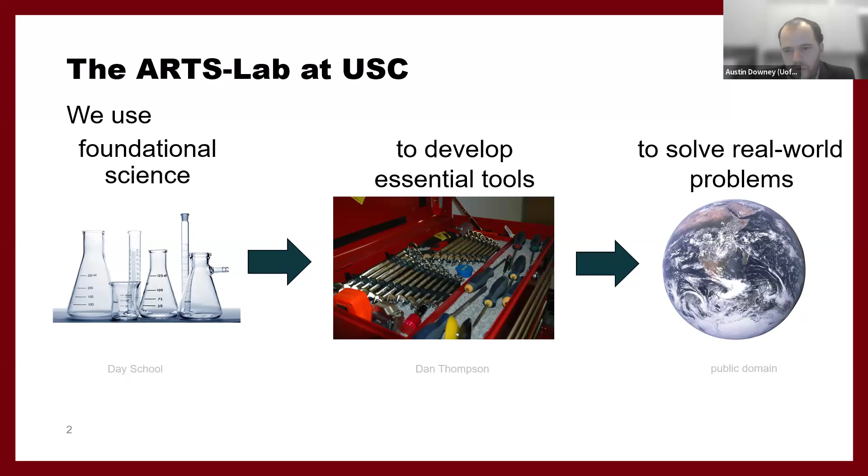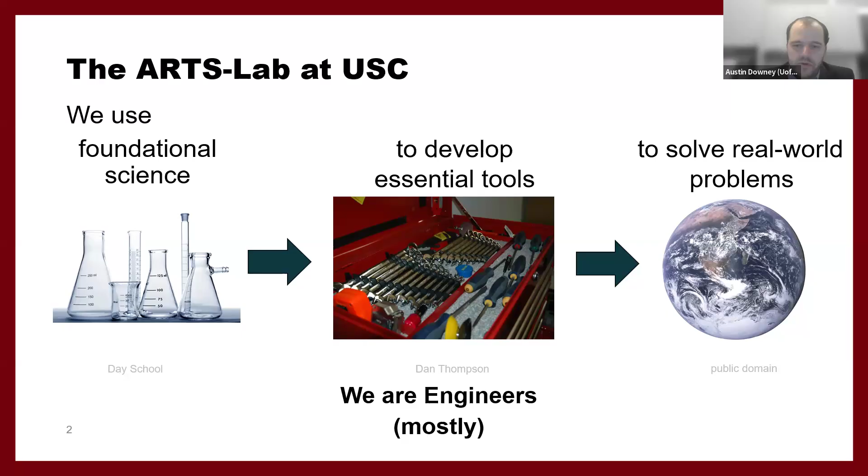We are engineers, is what I like to say, mostly. The group is made up of a lot of engineers, some computer scientists, a good chunk of computer engineers, a few physics, math, and some other interesting majors. So this is the group in general, or was the group about a year ago.

We work a lot on sensing for structural health monitoring, additive manufacturing, environmental health quality. We do a lot of data assimilation, so we use structural data trying to mix data and models, batteries and additive manufacturing, and a lot of AI/ML. We're very interested in explainability, automated decision making, and time series forecasting.

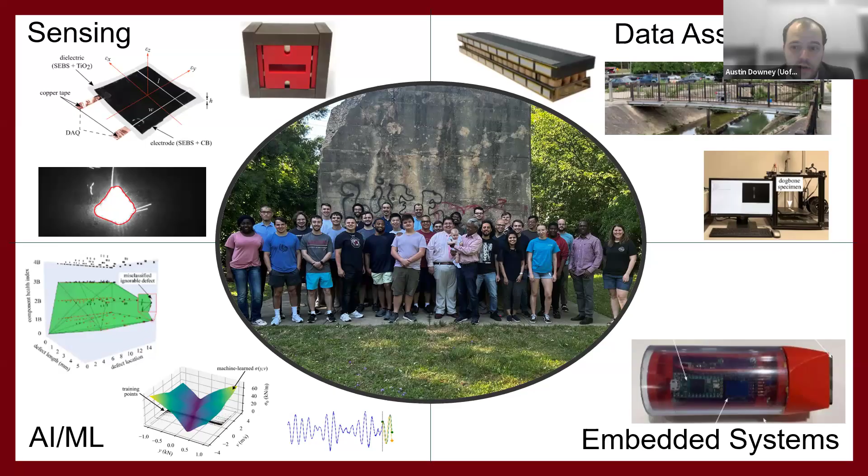And then the last one that might be of interest to the group here is we're very interested in embedded systems - a lot of microcontroller-based embedded systems, real-time operating systems, and FPGAs.

All of this is done with great collaborators all over the college, including quite a few in the Department of Computer Science and Engineering.

I apologize right off the bat if this seems a little simple, but I want to expose everyone to what civil infrastructure is. To me, I walk around any city I'm in and try to take pictures and look at the infrastructure, but I understand that may not be everyone.

So civil infrastructure includes the essential public systems - roads and highways. Roads and highways are very interesting because you have structures like bridges, and then you have materials like the road you drive on.

Bridges and tunnels, water and sewage systems - that's something you should be thinking a lot about. These are very old systems that are in great need of retrofitting, and are very expensive and very hard to retrofit.

Dams, levees, and flood control structures - very relevant to what just happened in South Carolina. Levees are a very challenging topic - you try to build huge dams to hold back the water using locally available material. It can be quite challenging.

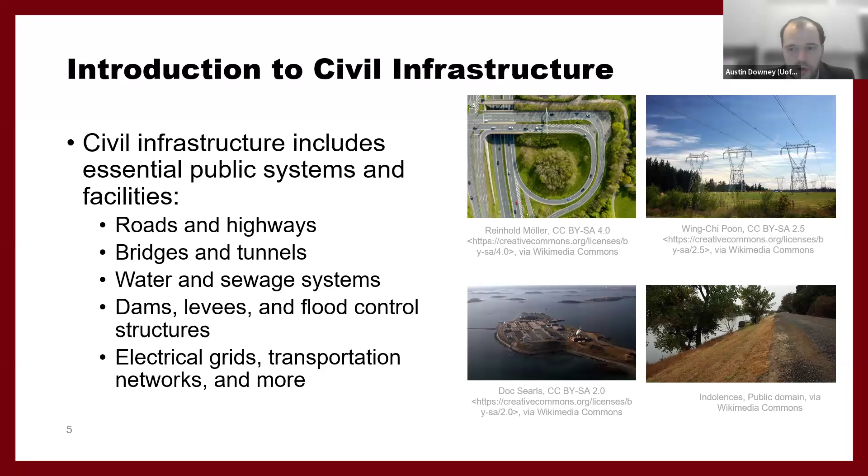And then something we won't talk too much about - electrical grids, transportation networks, and more. The electrical side of infrastructure is a whole different animal that we won't really discuss.

So infrastructure and maintenance upgrades are very important. On the top right is a picture from Germany, but this can happen anywhere - whenever you're having to upgrade infrastructure, it's incredibly expensive and incredibly detrimental to people's lives. So this isn't like upgrading a software package for an online shopping thing where maybe things show up a day late.

If someone's in a wheelchair, they can't get across this trench. If they're not able-bodied and willing to jump, they can't get across this trench. And so it can add a lot of hassle to people's life. And that's one of the reasons that we don't maintain infrastructure as much as we should, is because it adds hassle, which then comes back later and bites us.

The I-35 bridge collapse is on the bottom right. This was in Minneapolis. This was a bridge, lots of issues, lots of human factors here, but a plate cracked and wasn't appropriately corrected, and the bridge catastrophically collapsed, killing multiple people. And so, but these are very expensive, right? The bridge collapse that happened in Tennessee, very expensive. The bridge collapse, slightly different, that happened in Baltimore, very expensive, and eat up a lot of the budget and maintenance, right? So these are critical for public safety and economic stability, right?

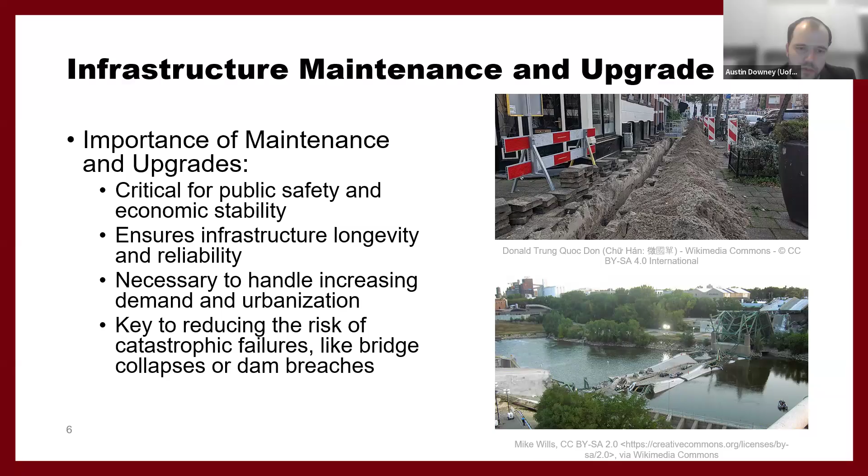Necessary to handle our increasing demand and urbanization. The world is urbanizing. The United States continues to urbanize. The state of South Carolina continues to urbanize. In the last census, the state of South Carolina gained population, but over 60 or 70% of the counties in the state actually lost population because people within the state are moving to the big cities and people from outside of the state are moving to the big cities.

This is not something that happens in the South as much, but where I'm from, up in the Midwest, you have a lot of rust.

So top right is water quality. This is kind of what happened in Flint, right? So our infrastructure affects the water we drink, the water we bathe in. One option is you just buy all bottled water, and that's a completely different conversation we can have about the effects on the environment of buying all bottled water.

The bottom right is the Arlington Memorial Bridge, right? And so this is outside of Washington, D.C., and we put salt on bridges to keep ice off of bridges, and this is what happens.

And so how do we maintain this infrastructure that's often built in an unsustainable fashion? As we continue to build suburbs, typically they are built by private companies that put a road in, and then they put a bunch of houses around the road, and then they gift the road to the city. Often the tax income that comes from the houses around the road is not enough to pay for the road. So who pays for that road replacement, resurfacing, in 20 years?

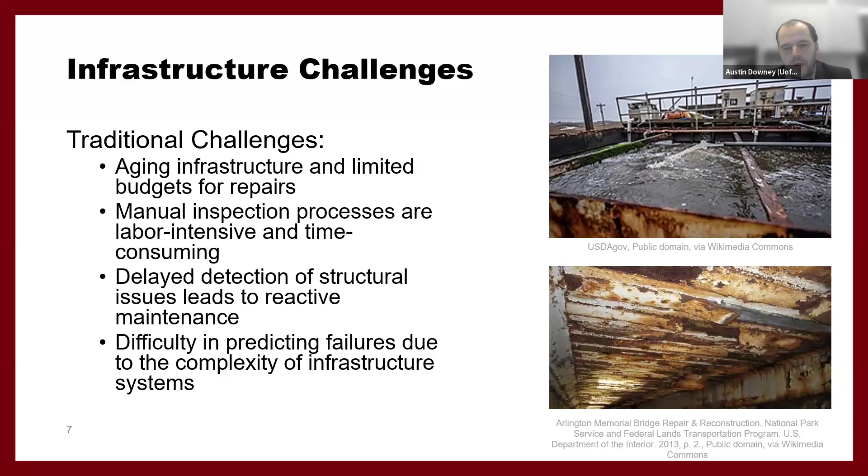There's a huge movement called Strong Towns, and I would encourage you to look at it. Just because the government may show up with a check once to pay for infrastructure doesn't mean that the localities actually have enough tax base to maintain the infrastructure going forward.

And so these are kind of the roles of automated decision-making, data analysis, machine learning, and I'm using the term AI here to encompass all of that, a very traditional aspect of AI, not just the newer, larger language models.

I also want to talk about the intersection of civil engineering and AI, right, or these automated systems. Everyone here is very smart, right? Otherwise you wouldn't be in a graduate program. And you have a lot of computer skills and technical skills, data processing skills. How do you actuate the world around you? How do you take those inputs and make them create changes in the world around you? It's not easy, right? Infrastructure is not something where you can actuate at a low cost.

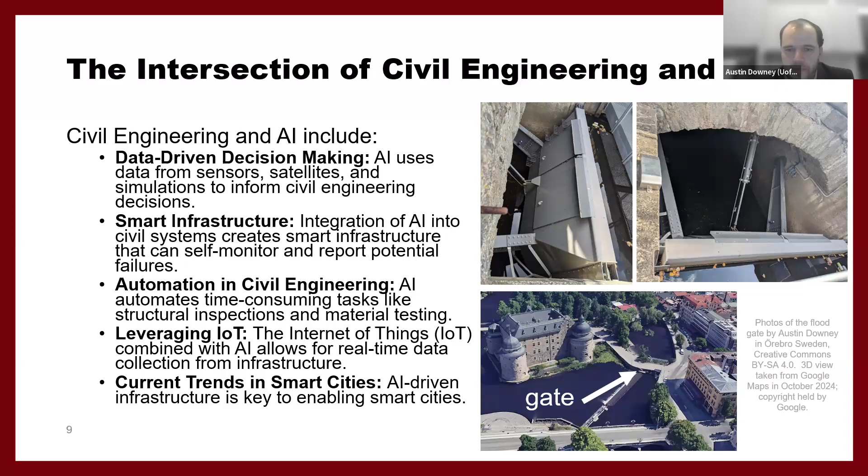So that's kind of a background on civil infrastructure, very broad, I understand. We'll talk through some applications and case studies, and feel free to speak up — I can't see, but if you have a question, just ask it. I'd love to have a conversation about some of the technologies we're developing.

One of the things we've been working on for a long time is structural health monitoring. We want to enable real-time modeling, monitoring, and early detection for predictive maintenance. This enables us to improve safety and reduce costs. We cannot afford to replace even a fraction of the bridges in the country, so we have to be very careful about which bridges we do replace.

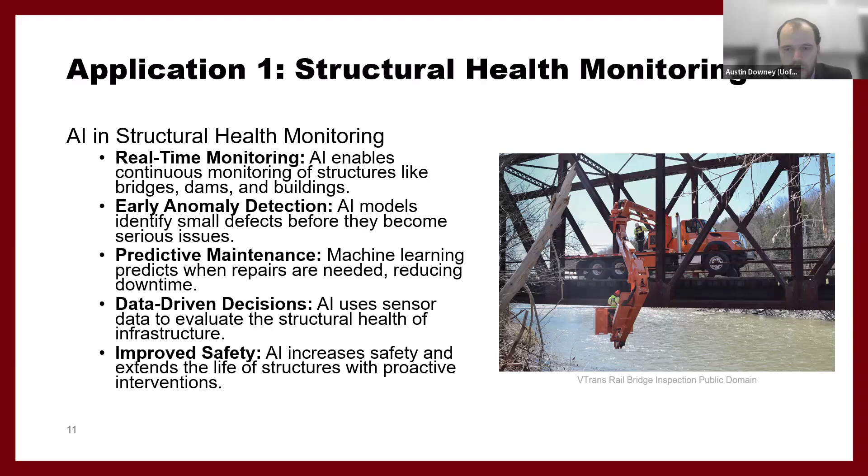AI forms a huge part of this — if you type in structural health monitoring, over half the papers will be related to AI and ML and how you process the data. It's a very interesting dataset because there's not a lot of data. The data you get from a bridge is very expensive, typically time series acceleration, and it's very hard to get seasonal variations in the data. So it's really a small data challenge, which is a growing field of AI — one-shot learning.

We've been working on this for a long time using large-area capacitive sensors that we've deployed on a bridge for over 10 years. On the bottom right-hand side, you'll see a bridge in Kansas with a fatigue crack, and these sensors monitor the fatigue crack, stretching over it. We've developed AI algorithms to process the noisy data and provide a crack growth indicator, CGI, where we can monitor the crack growth using a statistical analysis approach.

That's because you have a lot of changes in humidity, changes in temperature, expansion of the joints in the summer, contraction in the winter. So it's not just looking at the data spikes — there's a lot of data we need to pull out, and that's where a lot of the machine learning applications are coming from.

I also want to take a chance to express here that we do need a lot of help developing better AI systems for infrastructure. Civil infrastructure and civil engineering is very different from a lot of the traditional engineering fields you might study in college, because 99% of civil engineers — people who graduate with a civil engineering degree — have a PE, or are a professional engineer. You have to have a PE sign off on things that certifies they're safe for public use.

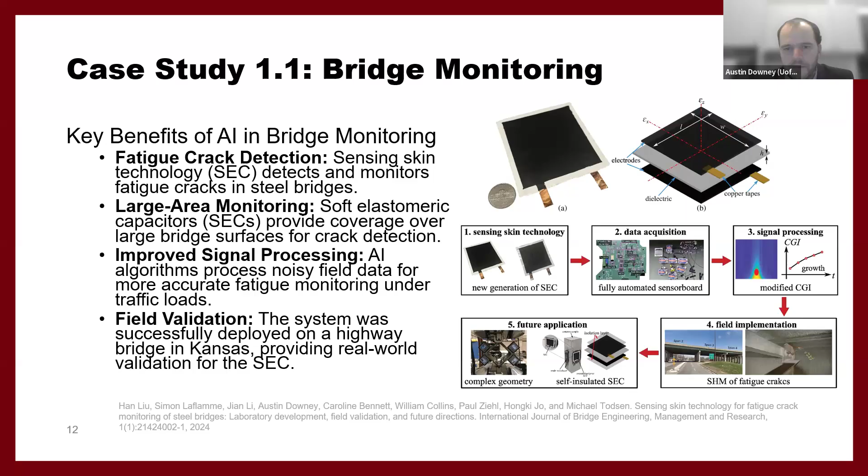Now, the accelerometers are not perfectly accurate, so we use kind of embedded AI, these LSTM compensators, to filter out the noise and pass a state at the lower levels of the frequency domain to help clean up the signal, right?

So we're very interested in autonomous sensor deployment, edge AI computing, and these efficient resource use, right? How can we do the computation at the edge so we only send back the information that we need?

Lots of other applications for things like this. We're definitely leveraging a lot of the work that's been done in edge AI for biomedical applications, where patient data is important. For us, there's not a huge security risk of sending back data from a bridge, but we don't want to pay to transport more data over the airways than we have to.

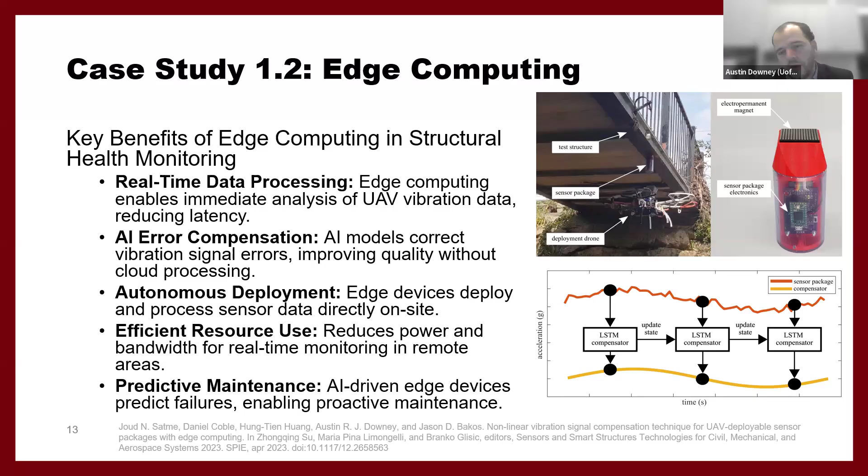And this is a lot of these are in rural locations, on the bottom side of bridges. You don't actually have very good cell network coverage, right? You might have decent cell coverage if you move a foot to the right, but when you're magnetically attached to a steel beam, you can attenuate a lot of cell signal.

Another challenge that's really interesting in terms of an AI methodology is water quality monitoring, right? So there's been a lot of work on real-time monitoring. You can buy sensors for things like pH, turbidity, contaminants, but lots of emerging contaminants, PFAS, hard metals, heavy metals, these forever chemicals.

There's a very big interest in early detection of contaminants, right? So you think about all the flooding that just happened. When that hurricane goes through North Carolina, there's a lot of pig farms in North Carolina. What happens to the runoff, right? Is that water safe to be in? What happens to the ecosystem of that water? Does that get down to the estuaries and affect clam life? So lots of kind of things that we're looking at.

Of course, some of the AI ML applications here are kind of predictive analysis, automated alerts, things of that nature. So one of the things we've been developing is a nuclear magnetic resonance-based water quality monitoring with online learning.

And this is a really interesting project. Been working on it very hard over the summer. And I don't know if you know what NMR is, but maybe you know what MRI is in a hospital. So MRI is magnetic resonance imaging, and that makes a picture. NMR is a technology, nuclear magnetic resonance, that makes a pixel of that picture. And you just measure the precession of a hydrogen atom and how it decays.

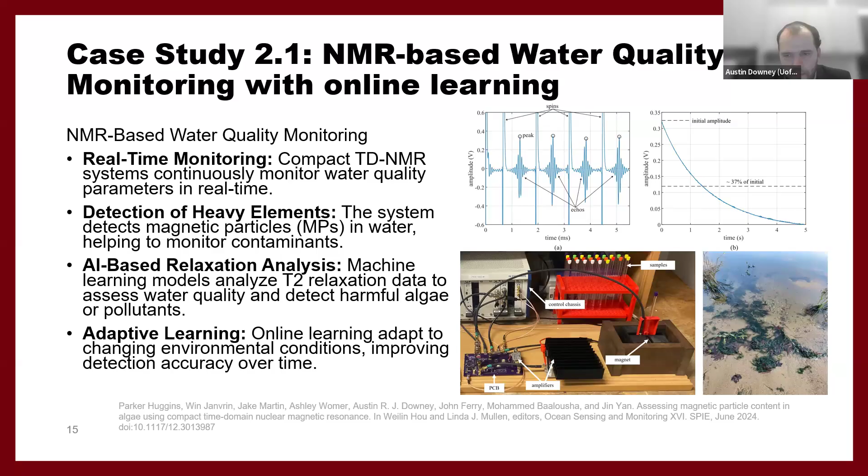So we've done AI-based relaxation analysis and adaptive learning. So that's an idea that we can put this system next to a lake or a river, and we can continuously sample. And maybe when we get a lot of uncertainty in our classification-based method, we take one sample back to the lab, run a battery of tests on it, update our prior, and then continue to sample.

We've also been developing these drone deployable in situ water quality monitoring sensors. Again, we're very interested in kind of edge computing and what kind of algorithms can we run at the edge.

Maybe particularly with this project, we're looking at federated learning, not so much from a cybersecurity aspect, but from distributing these machine learning algorithms across a variety of hardware systems. We drop these packages from a drone to do real-time monitoring - it's pretty trivial in terms of sensing: pH, total dissolved solids, temperature, turbidity. But one of the things we're wanting to move towards is, can we help forecast algae blooms? These are not purely data-driven approaches - we still have to understand the physics, but there's definitely a need for those with more expertise in data-driven application systems that come from a computer science background.

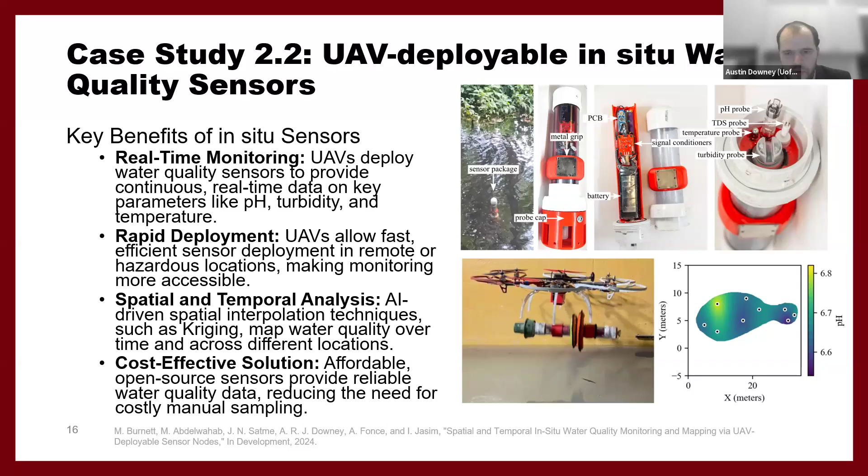Another way is optimal train scheduling and routing. Maybe it would be nice to have 5 or 6 trains a day from Stockholm to Gothenburg, but maybe you only have 3 trains a day, and the other spots at your train station are taken up running them to smaller towns. Because it's not always about how many people want to move from A to B - it's about what kind of induced demand you can create. And when you're a state-run train operator like SJ is, they have a public good they're trying to serve. So there's lots of operations in that.

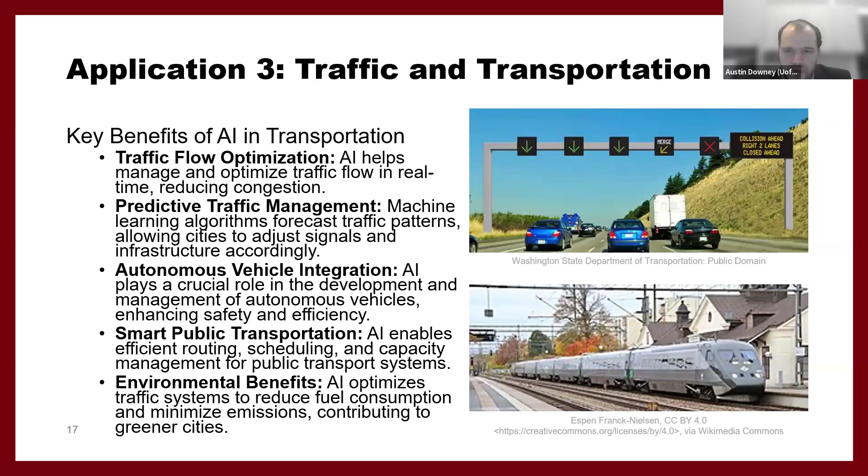Lots of environmental benefits. One thing I won't talk about is the electric scooters that proliferate downtowns now - that has come from a computer science background, which is something that several city planners have mixed feelings about, the electric scooter conundrum that is happening in urban environments. So something to think about.

Another thing we've been looking at a lot more recently is electric aircraft optimization. Aircraft optimization is a huge field - lots of very smart people have been working on this for a very long time. Aircraft optimization is about one thing: keeping your plane in the air as much as possible. When you start to look at battery electric aircraft or hybrid electric aircraft, probably the farthest along electric aircraft company is Heart Aerospace, and actually from my window I can see their headquarters across the bay here in Gothenburg.

You can look that up - it's how do you manage these battery packs as you pick routings? If anyone has an electric car, you'll know you're not supposed to charge it up to 100% every day. Your battery will last quite a long time if you go from 60% to 40%, but you just won't be able to drive very far. That's very different than pumping jet fuel into an engine. So we've been doing a lot of load sharing analysis for battery life, predictive maintenance, battery degradation prediction, using a number of models, mainly physics-based models, and optimization techniques.

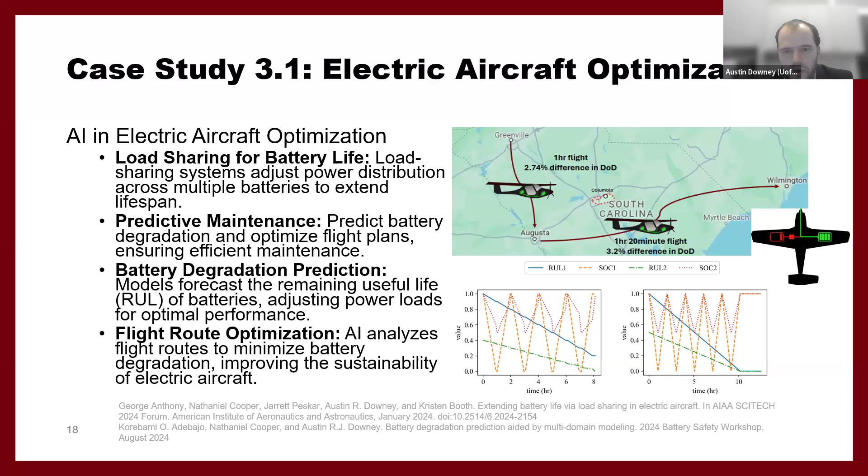You don't know some of Rock Hill's, like what kind of development has happened in Rock Hill, right? And so that water comes in here at a different rate. Rain does not spatially fall evenly, right? You can have quite hot spots of rain even in a storm, and how that falls and what it falls onto is very important.

So flooding's not too much water, right? It's too much water in one place at one time. If we can find a way to separate this water out, we can help manage floods, and AI can help do a lot of that.

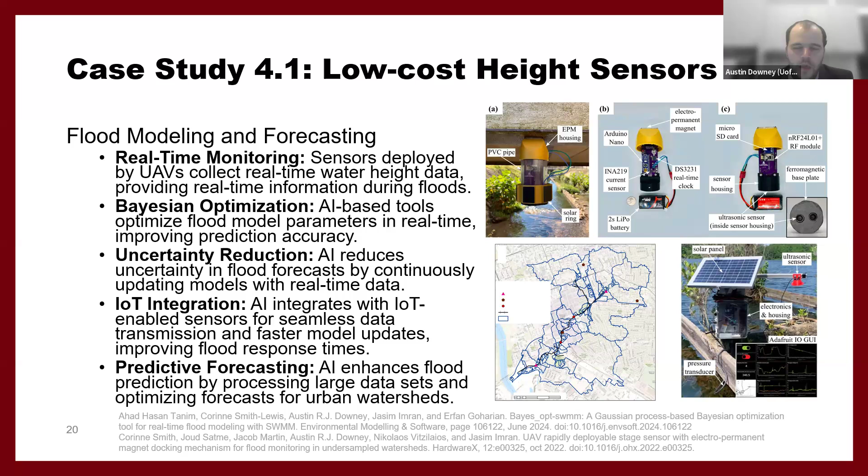Everyone would like to be able to use the easiest data available, and sometimes in a civil engineering context that becomes—used to be Twitter or X or social media data, or maybe live feeds from cameras—but that data isn't always where you want it, when you want it, and can easily saturate your system. So a lot of work has been developing on getting higher quality data.

Another challenge we've been working a lot on with edge computing systems has been geotechnical monitoring. Levees are fascinating. One, they protect billions of dollars of built up human environment—houses, farms, factories, everything.

When you build a levee, you don't keep the river in the banks—you keep the river in the banks where you are, and it's kind of like declaring war. The community downstream now has to build a levee, and the water will either go until it hits the ocean, or it busts a levee. Those are basically your two options.

Levees are built with whatever material is local—you don't get a choice of high quality dirt, clay, and substrates, you get what you have—and then they're incredibly unmonitored. If you ask, and I don't want to throw anyone under the bus, the South Carolina Department of Dam Safety or anyone how many levees are in the state, they'll just kind of look at you and smile. We don't even know how many miles of levees are in the state of South Carolina, or who owns or is required to maintain them.

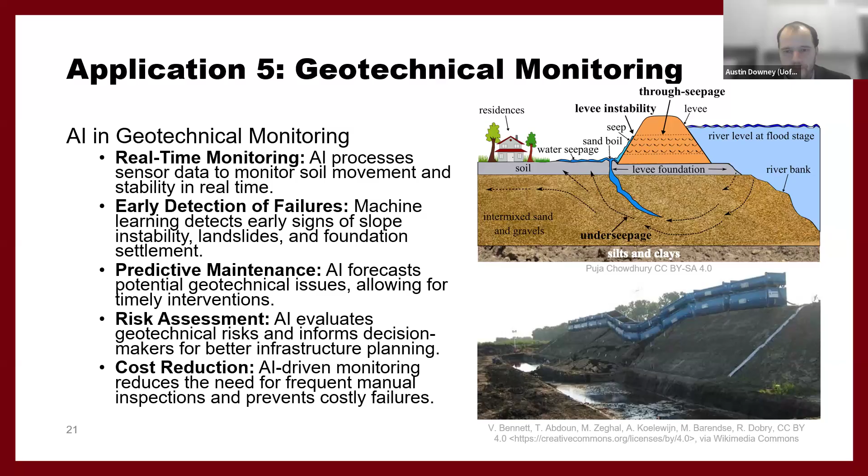Soil is incredibly fascinating. I'm not a geotechnical engineer, I don't pretend to be one. But the thought experiment I'd encourage you to think about is if you've ever seen anyone try to pour water on dry soil, what happens compared to pouring water on soil that has some moisture in it? You might logically think dry soil would soak up water faster, but it doesn't. Water will actually run off of dry soil.

Partially saturated soil is what will soak water up, which is why you get flash floods in the desert. Just because water falls on the desert doesn't mean the desert can take it — it's too dry. These are some of the challenges we have with levees. Soil is incredibly challenging to model, and that gives it a lot of benefit for data-driven modeling, especially since it's changing with the climate. There's some great work out there, including by my collaborators at Jackson State, looking at how changes in climate have changed rainfall patterns and what that means for infrastructure all over the country.

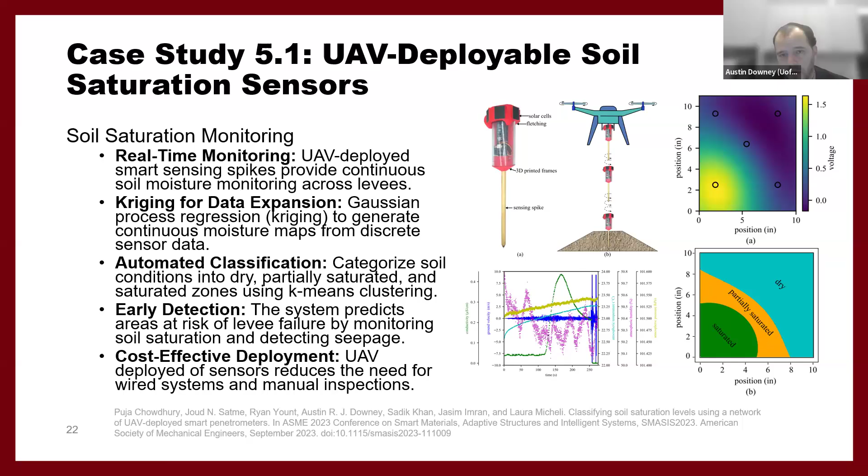We've also looked a lot at LiDAR-based monitoring. LiDAR is kind of like light-based radar, in non-technical terms — you shoot a light at a structure, it bounces back, and you can measure the topology of the structure. In Jackson, in the state of Mississippi, they have a lot of challenges related to expansive clays and soils — soils that shrink and swell a lot.

Do you want to build a highway embankment out of an expansive clay? Absolutely not — it's literally the worst soil in the world to build a highway embankment out of. But soil is expensive to move, so you build it with the materials you have, with the data you have, which might be the rainfall for the last 50 years. But as we talked about, rainfall all over the country is changing because of the way the climate is changing.

How the rain fell in 1950 is not how it falls today. We get a lot more rain in the Southeast, parts of the Midwest are drier, and so our expansive clays have become more of a challenge. LiDAR has become a fascinating tool, but it gives you millions of data points — how do you process millions of data points? It can be quite challenging.

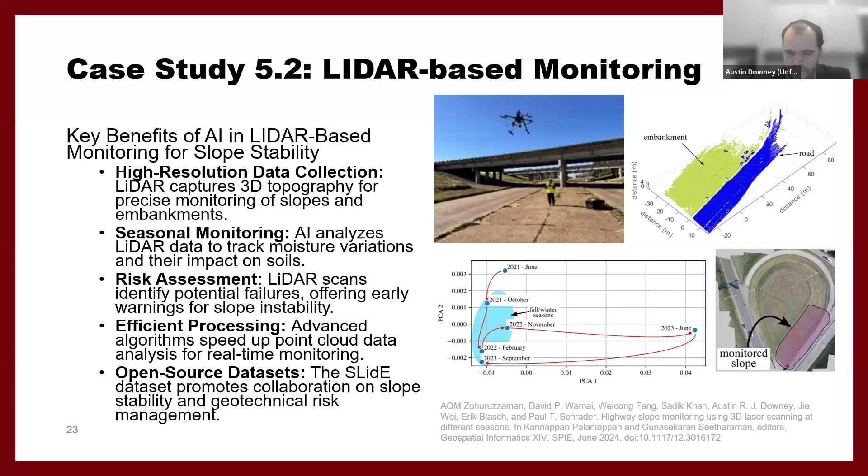You can see that in certain parts, like June, the PCAs are very, very different than in the fall-winter season. In the summer the soil expands, and in the winter it contracts, and it's slowly cracking the road, leading to lots of lawsuits and post-geotechnical work and challenges that happen from there.

So one of our issues with civil engineering is data quality and availability. I can get you a lot of data, but does that data have value? We have limited access to high quality labeled training data, and the labeled part is particularly important because we may not even know how to label it.

If you look at some geotechnical problems, I can get you geotechnical data, but I don't know if that levee is good. I might not know until the next flood, but then it's too late to do anything about it. Or you take core samples, but people are nervous about that because it's destructive.

Model interpretability - we want to be able to trust the decisions. This isn't like 'you might like this video, oh you don't like that video, well maybe you'll like this show.' We need real decision making that's explainable here.